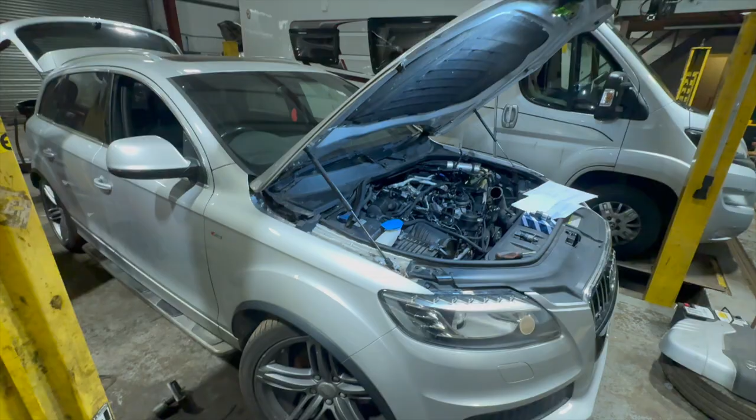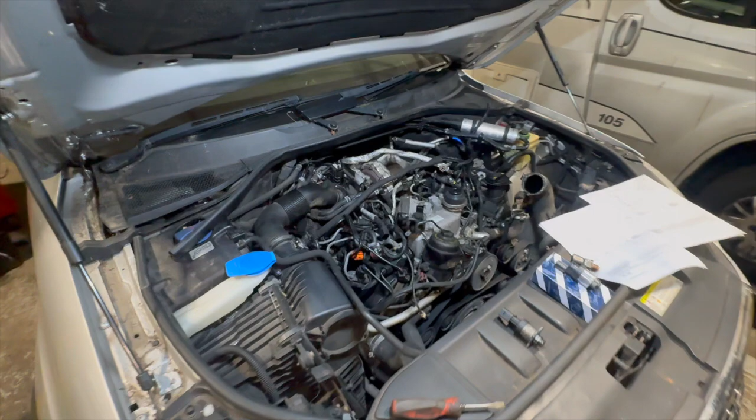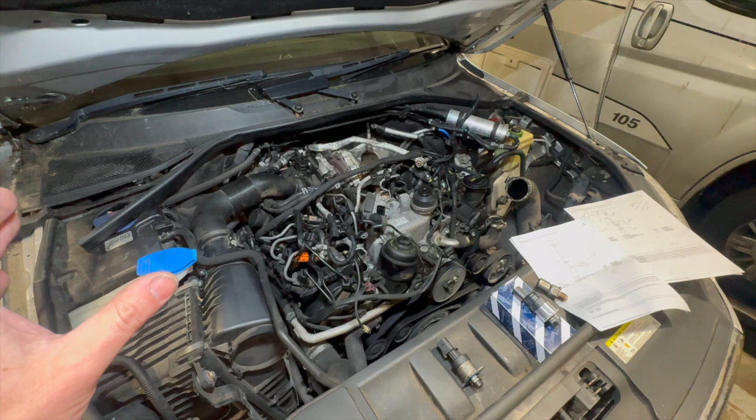Just put together a short video running you through a fault we've got with this 2013 Audi Q7. Basically this one's a non-runner, we've got a permanent fault code in it, and the fault code is P0091 Fuel Pressure Regulator 1 control circuit. I'm going to run you through information about the fault, the regulator, where it is, some tests you can do, and where I'm up to with this one. Long and short of it, I'm going to be replacing the regulator. I'll update you later in the video as to whether it fixes it or not. There is a possibility of it being an ECU fault, but this is the route of diagnosis we're taking.

So basically on the system it's got a permanent fault with regulator 1. Now there's two different regulators on it. Regulator 2 is this regulator here, which sits on the end of the fuel rail. There's a fuel pressure sensor in the system, which is this sensor here, but just at the minute you can see we're in the stripped down state. We've actually got the inlet manifold out from the middle of the V there, but the pressure sensor actually goes into the rail on that end there.

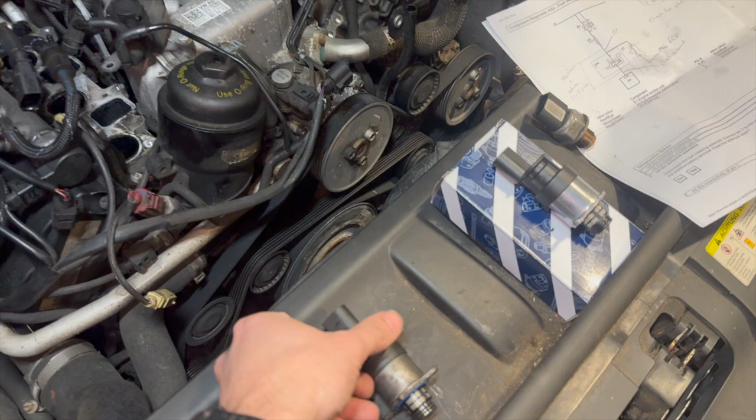And fuel pressure regulator 1, the item that we've got a fault with, or picking up a fault with on the diagnostic machine, this one here actually sits into the high pressure fuel pump, which sits right in the middle of the V, right at the back of the engine. And this is why I've had to strip the manifold off, to access it and get it out properly.

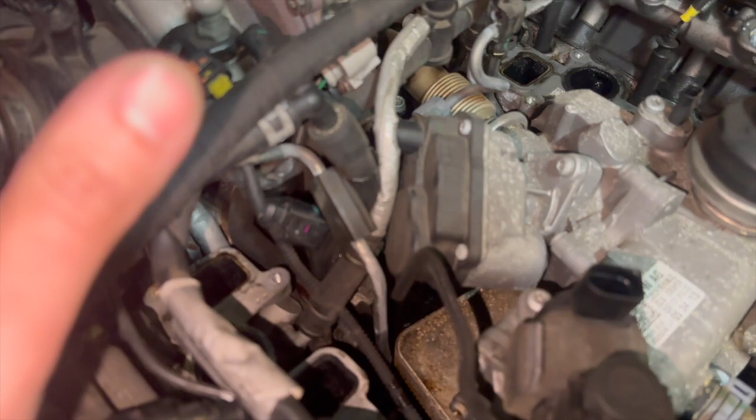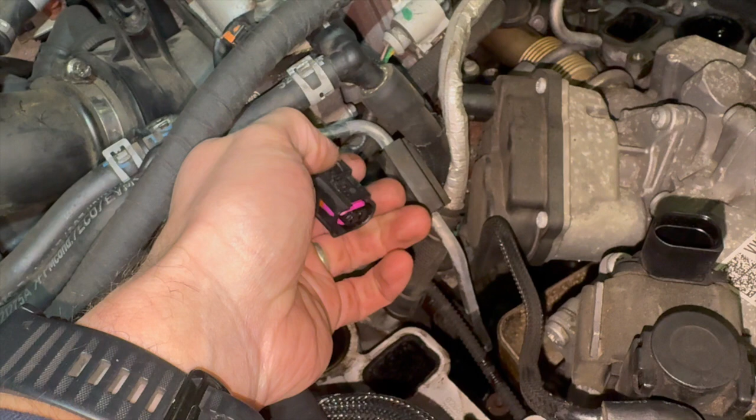But if you just look through this gap just there, this is the connector for it. It just sits in there, you can see it fits in with a couple of bolts. When the manifold's on, it's really tight. You can just reach in there to undo the clip on the connector and pop the connector back, but you can't really get the connector out. If you're a bit rough you can sort of force it off, but luckily for doing some tests on it, it's quite good - this connector actually comes round, round this side, and comes to this bit of harness there, which connects into that.

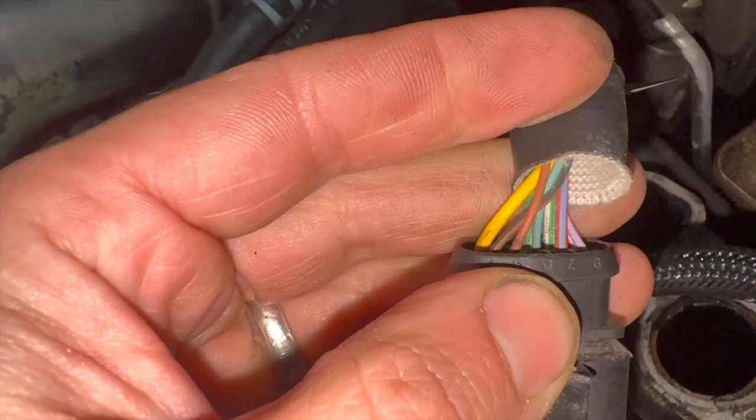So luckily you can actually test it at this harness, and the two wires on it are white and green, and red and blue. If you look on the bottom there, where it says pin 4, we've got the red and blue wire, and pin 8, the green and white wire. So you can use your multimeter on those bottom two to actually test for resistance through the regulator. And in doing that, if you've got resistance, you know you've got continuity on your two wires, and it's not a wiring fault in this harness to your connector.

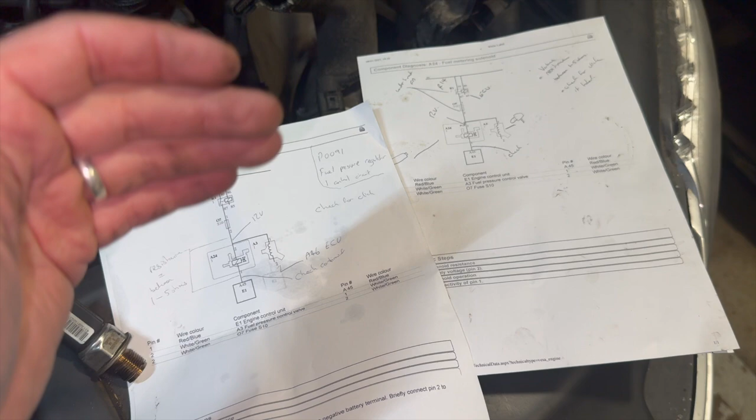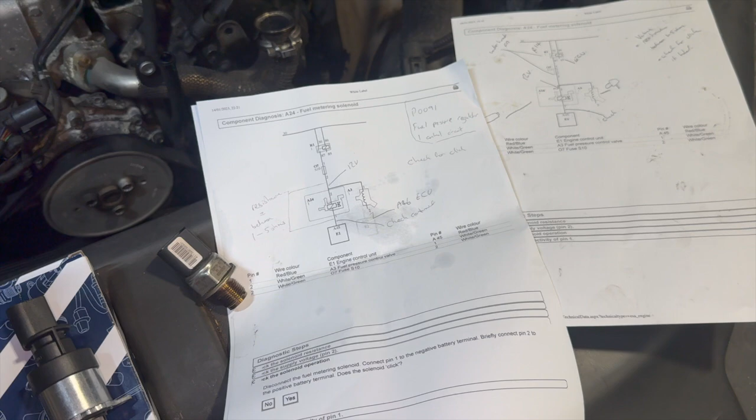But just looking at the wiring diagram - now I'll overlay some screenshots of the wiring diagram in a bit more detail and show you the exact procedures to do as well - I've tested all the wiring on this as far as I can go. There is a possibility of it being an ECU fault, but we're taking the gamble and taking the route of replacing this regulator first, to try that before going down the ECU route.

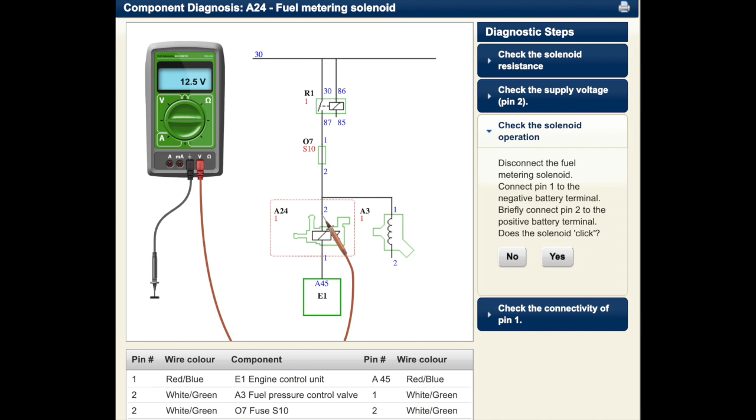Now these regulators, the factors and the dealers only sell them as part of a whole new high pressure fuel pump, which is obviously mega expensive and a lot more involved to fit. The only problem I had is I had to get the regulator out to get the number off it, to try and search to find one. And I'll put, if you check the description below, the part number of the unit and a link to a regulator and where you can get it from as well.

It's just at the price of this, it's going to be worth trying the regulator first. And with it being a permanent fault code, it's more likely to be an electrical issue rather than a mechanical issue. If the fuel pump was failing, normally it would allow you to clear the fault code and then it would pick the issue up as soon as you cycled the ignition or tried to start it again, whereas this is permanent.

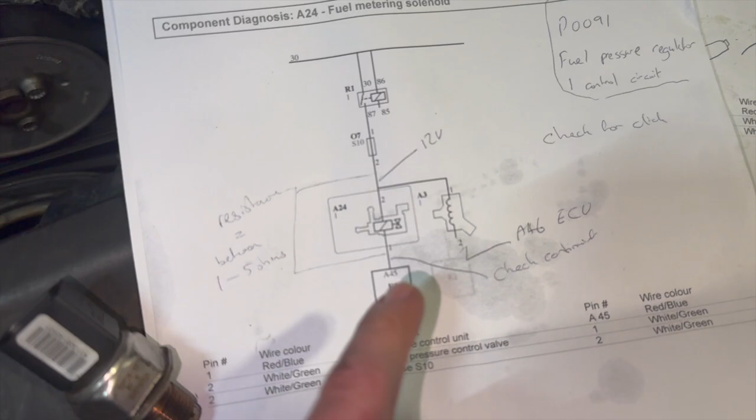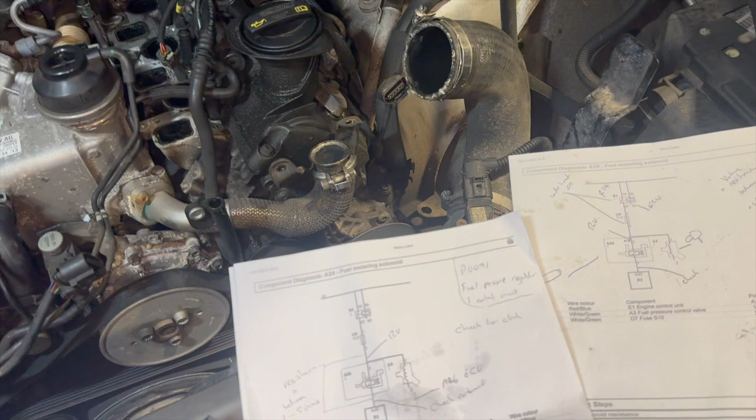But basically the checks that you can do on the regulator - so this is the regulator there - do a resistance check across the two wires. It should be between 1 and 5 ohms. When I was testing mine, I did it across the two wires and I actually had a reading of 3 ohms on it, so I know there's continuity through the wires to the regulator, and it's within tolerance. The other thing we can do, we need to check the 12 volt feed to the regulator.

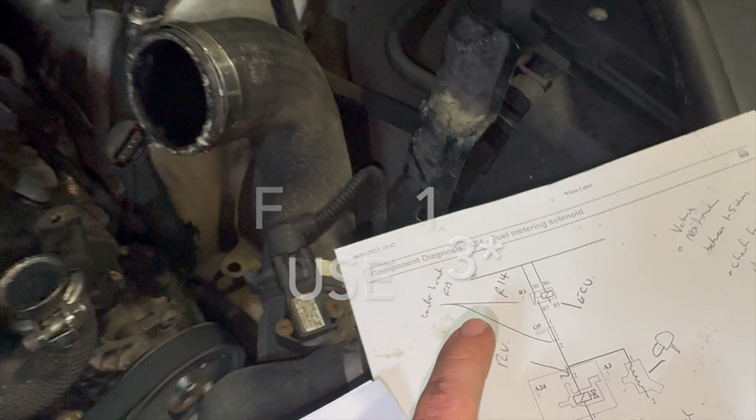Which comes in on pin 2 there. Now there is a fuse in the system and a relay as well, and that fuse is fuse 13 in the fuse box and relay 14 in the fuse box again as well. That's just the under bonnet fuse box, which is just located under that cover there.

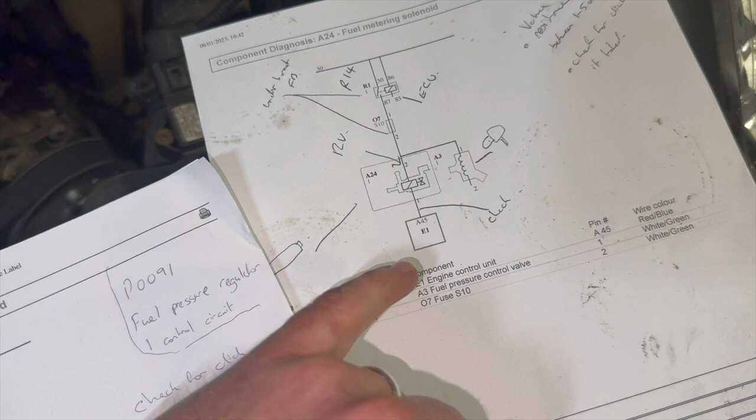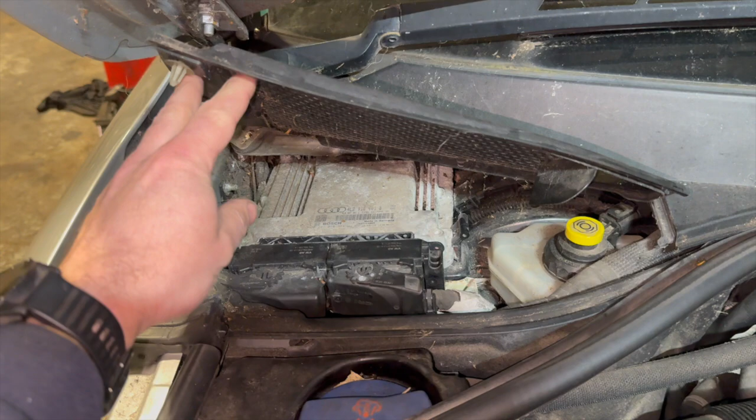The other thing we need to do is check continuity between pin 1 and A45 on the engine ECU. Now to do that, it's not too bad. You can check it from this plug there, but obviously on the other side, the engine ECU is just located under there. Now, the only problem you'll have - the ECU just holds in with a couple of plastic tabs there. It's actually quite easy to get out.

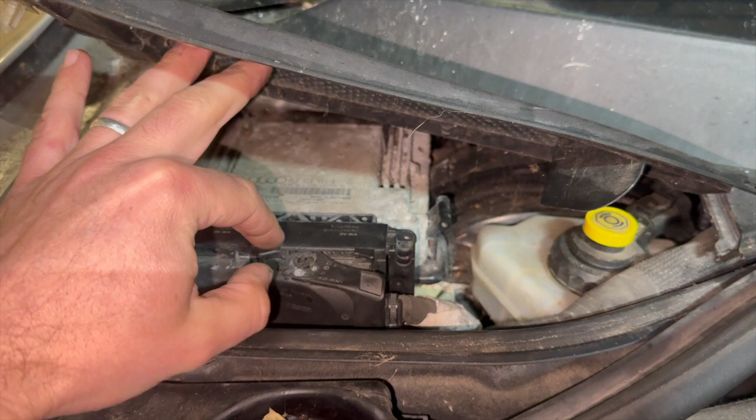I can't remember what connector it was on, but it's on one of these - you'll find the 2 pins there. Now, this originally, unless yours has been took off, might actually have a security tab over the top of it, but luckily on these Audis, it's not too bad to deal with. You can undo the ECU, just pull it out, and the security tab just stops you taking the connectors off.

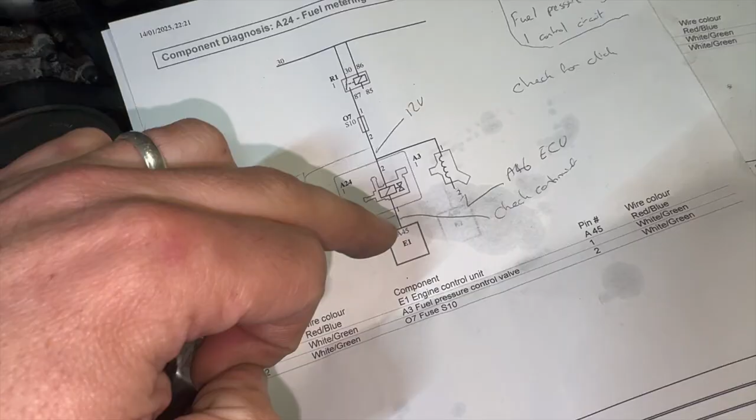But basically what you can do is just use your grinder, just put a couple of little slits in the bolts, then you can undo the 2 bolts with a flat bladed screwdriver. Once you've got that off, you can test your continuity between pin 1 on your regulator and your ECU as well. And you can actually check the operation of the solenoid as well.

Again, you can do it just through that connector there. It is a 12 volt regulator, so you're okay to use like a power probe and basically just listen for the regulator clicking. Now, I just powered it up through there and I could hear the regulator clicking, so that was a good sign. But at the minute, it's a permanent fault.

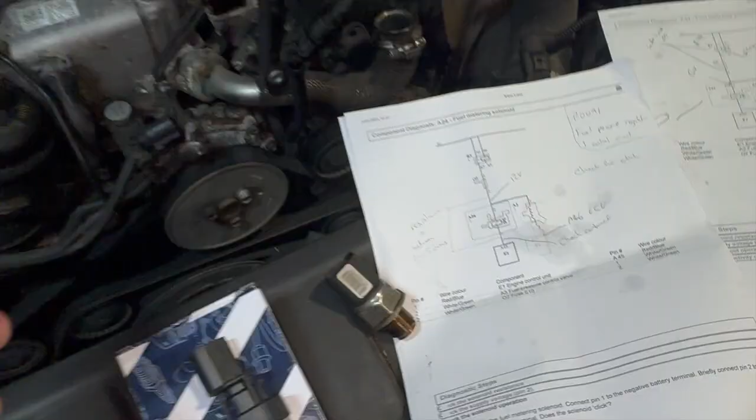I'm hoping it's going to be related to the regulator, so what I'm going to do next is get the regulator fitted, and then we'll let you know if it fixes the fault. So there is a possibility it could actually be an issue with the ECU, but for the price of it, I'm going to try the regulator first.

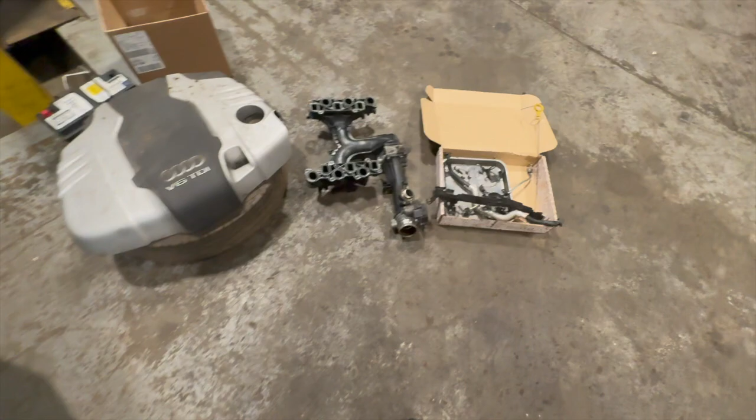It's just a little bit of a pain that to get this regulator off, you've got to take the manifold off. There's no way you'll get it out - you just cannot access it without getting that manifold out, that's all. But if I just show you the manifold, you can just see it's quite a big lump.

I've ordered some new manifold gaskets. Obviously they really want to be replaced while you've got it off, but there's quite a few bolts on there holding that on. I've taken this front section off with it as well. There's some bolts holding these 2 pieces to secure them up, and obviously a fitting for the pipe there. See a bit of trim for the wiring harness.

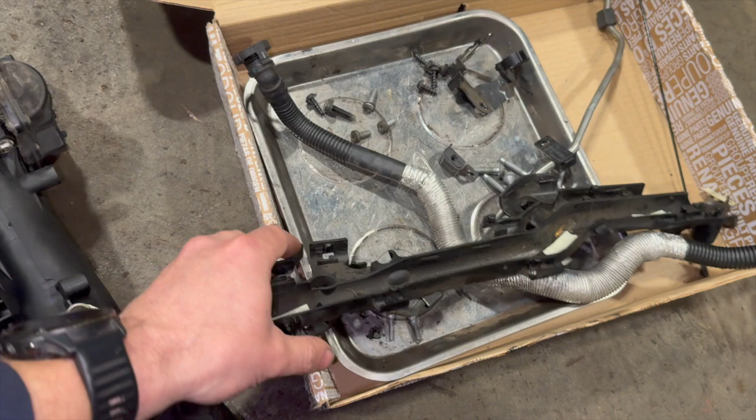One of the fuel pipes has come off, breather hose, a load of brackets on there as well. Now, it is a little bit fiddly to get the manifold off. It's not too bad, but things like the injector return hoses come over the top of it, so you'll have to undo that from one side to pull it out of the way.

Quite a bit of the wiring harness and plugs have to come off and get out of the way. Some of the high pressure fuel pipes at the back sit just over the top of the manifold and make it a bit tight to get out, so you need to undo them. I've taken one fully off, and on this side I've just undone it.

Just eked it back a little bit to allow room to get it out. When you've got all the bolts undone, sometimes the manifolds can be stuck down a little. You want to be careful, make sure all your bolts are out, but sometimes you just need a little light prying to crack the manifold off. Sometimes they just get really stuck down, that's all. But yeah, the manifold's off now.

It'd be nice to just plug this connector in and try to clear the fault code. Because it was a permanent code I couldn't clear, it would tell me quite quickly whether it was going to be the issue or not. But the problem is, because the manifold's off and all the fuel pipes are off, it's got pre-pump in the tank. Not really going to be able to do that until I've built it all back up.

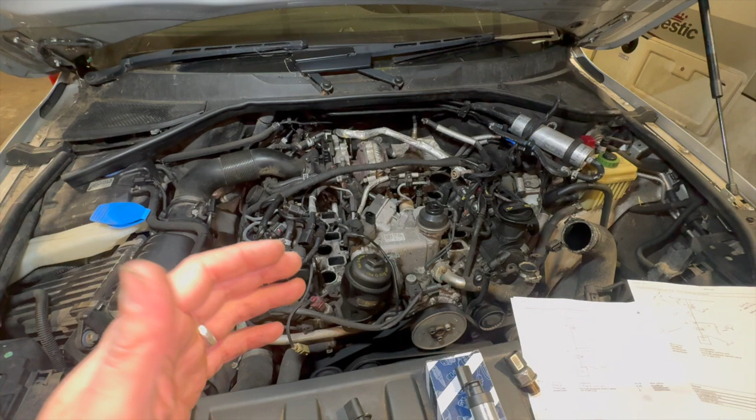So I'm going to skip through the stage where I'm refitting it, but I'm just going to get the regulator fitted now, get everything back together, and then come back to the video once I've done that and show you where we're at. Hopefully it'll clear the fault and it'll be running. If not, we're going to have to carry on the diagnosis and go down another route. We might have to send the ECU off, so I'll crack on now, get all that done, and update you shortly in the video. Hopefully we can get this fault fixed.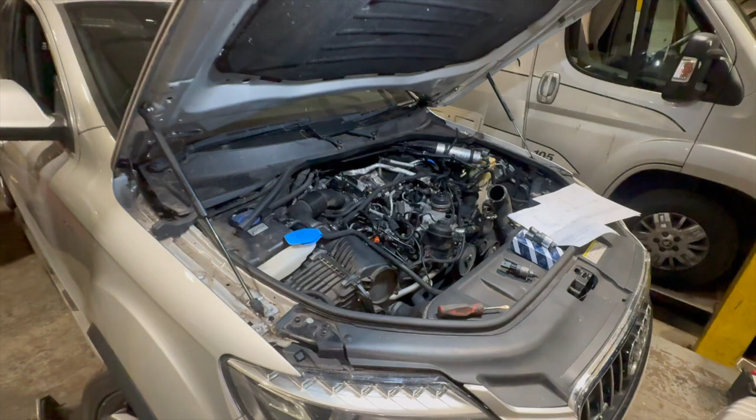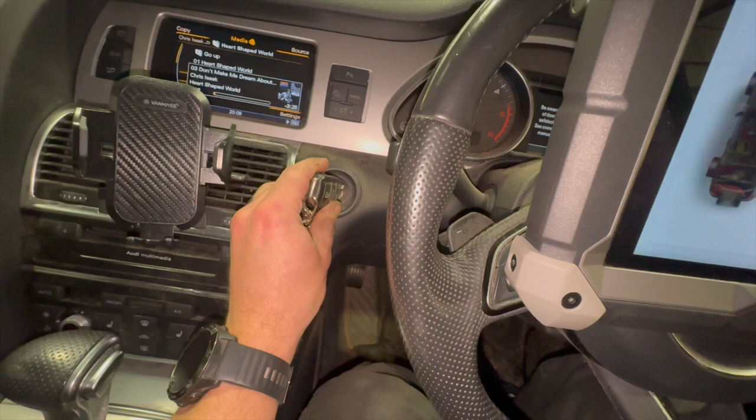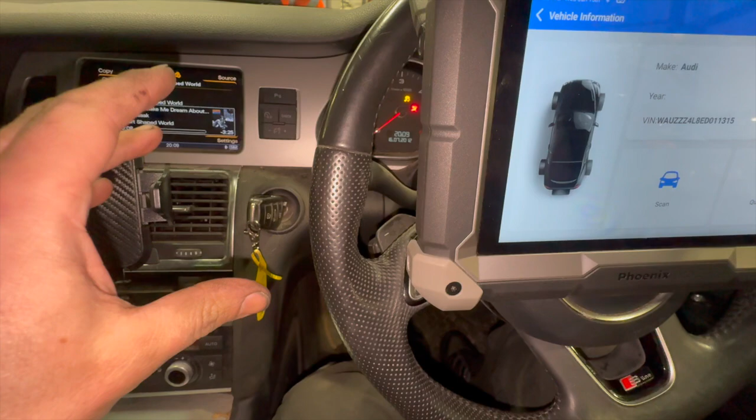Right, so I've just got in the vehicle. The only thing I've just done before trying to clear the codes and start is cycle the ignition a couple of times. Just do that, you can just hear the fuel pump working in the back. Because all the pipes have been off, you really want to cycle your ignition a few times just to prime the fuel system. But yeah, let's just do a full scan now, and hopefully, fingers crossed, we can clear that fault code out.

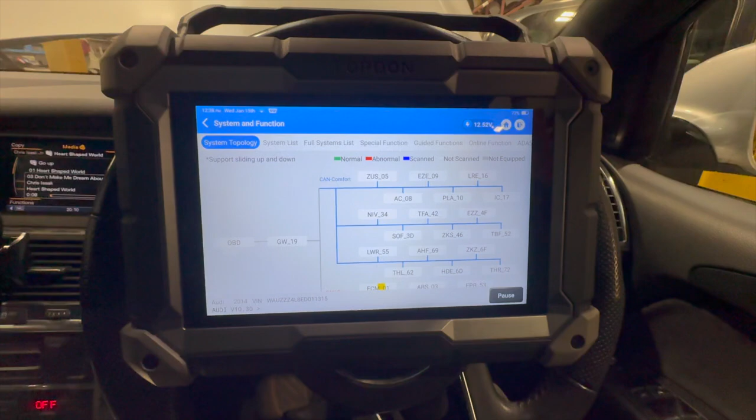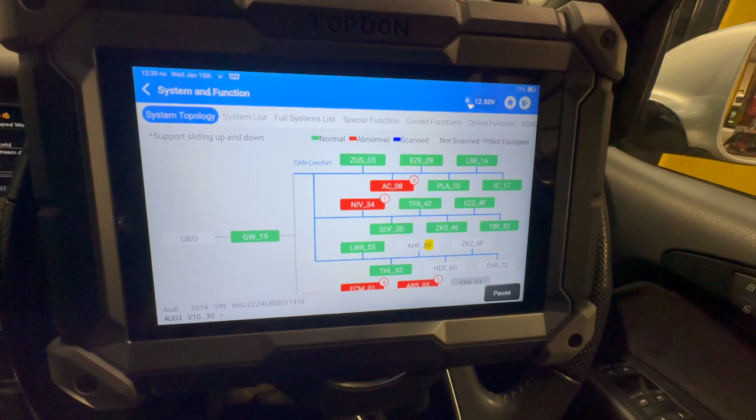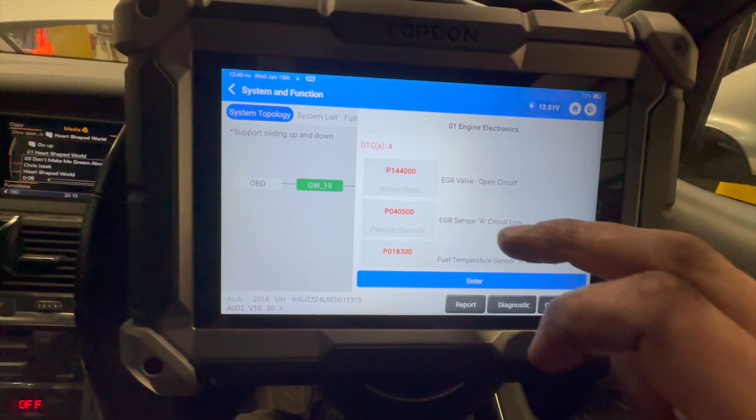Right, so as suspected, there's quite a few fault codes in there due to having all those sensors disconnected and stuff like that. There's going to be a few bits in there. Now, this was the one we were originally looking to clear that's permanent and that we can't clear. So let's just do a full code clear and see if we can get rid of it.

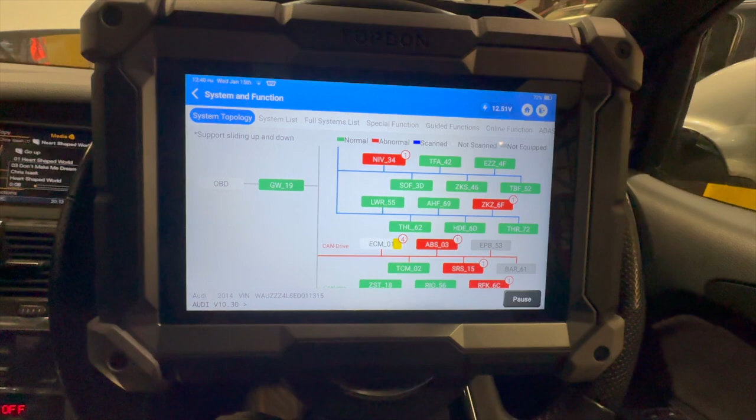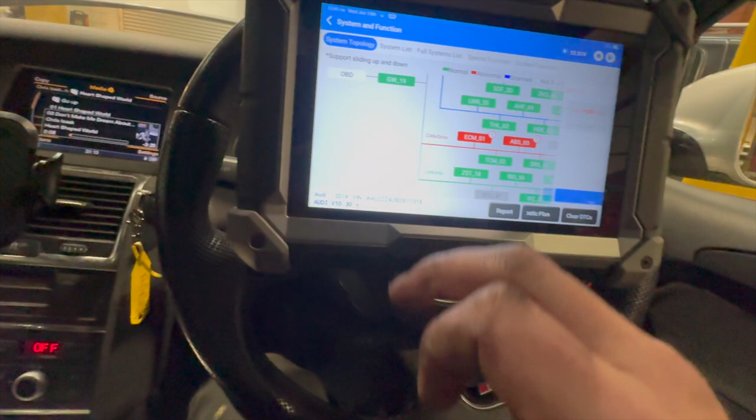Right, so it's not looking good at the minute. The fault code is still in there. We're just going to try and start it up to start with, and go from there. It looks like we might be having to spend a bit more time on this one. Let's just give it a bit of a crank and see.

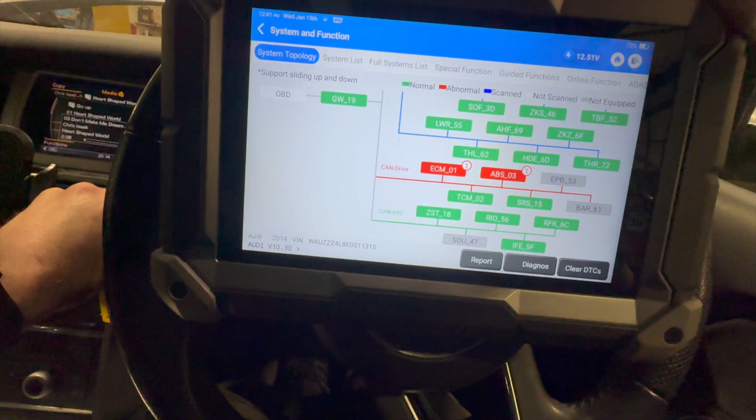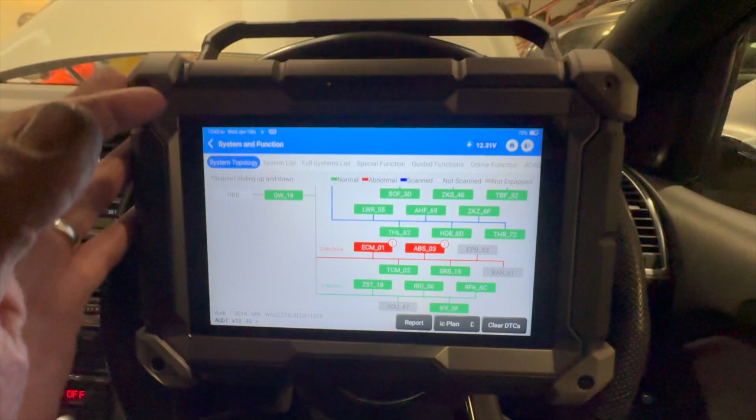It's not looking too good at the minute. It looks like we might be having to go down the ECU route now and send that off to get tested. So we'll do a little bit more digging into it, see if we can get a bit further along, and update you shortly.

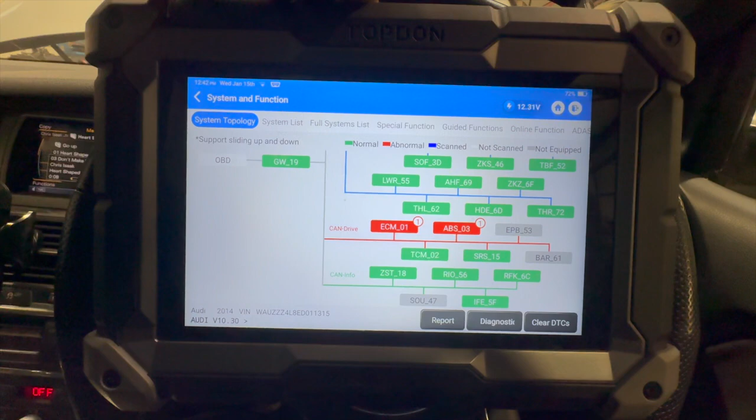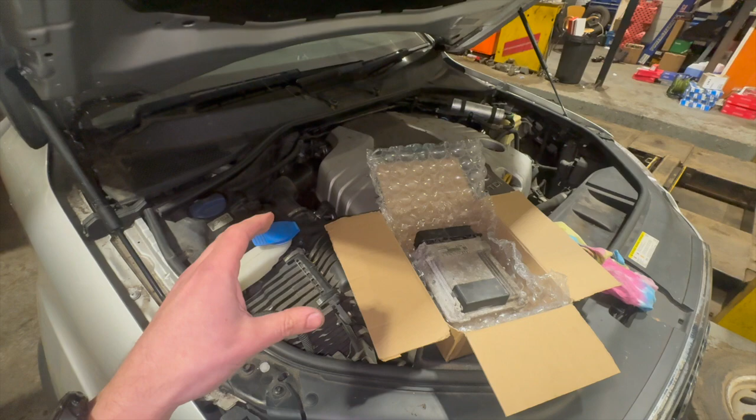Right, so it's two weeks later and we're back on the Audi. Bit of good news, a bit of bad news. Obviously I'd fitted the regulator, I took that, it was a little bit of a gamble. I wasn't 100% sure if it was going to be the regulator or the actual ECU that was the fault.

With the cost of the regulator, I decided to go down that route and try the regulator rather than sending the ECU off. I don't really like to condemn ECUs, I've not had to replace many in my time in the trade. Normally I find the fault ends up being something else or a wiring issue, and sometimes if you send it off and they're not 100% sure, you end up committing to a repair cost and it not actually being that. But unfortunately this time it obviously wasn't the regulator.

I've sent the ECU off to a company called ECU Testing that we use, they're in the UK. There's another one we sometimes use called ACtronics, but they couldn't actually test the unit when I gave them the number. ECU Testing have tested the unit and confirmed it's at fault for the code I was getting. The only problem is it's too bad to repair, so they can't actually repair the unit. So we're a little bit stuck in limbo land at the minute.

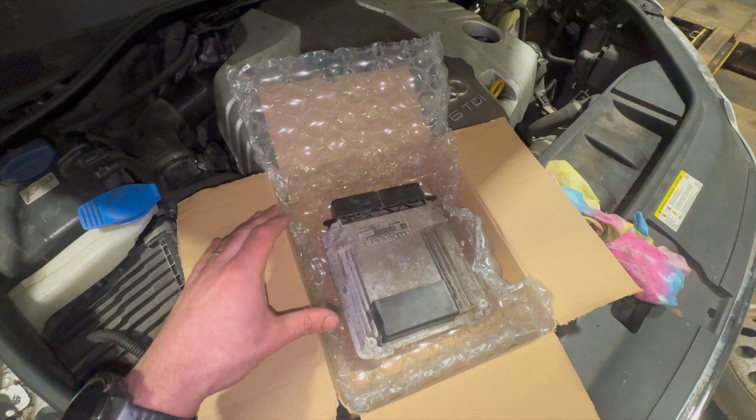There's a couple of options. I might be able to get a decent second-hand one, send it off to them with this one, and they might be able to make good out of it with the other ECU. But at this stage I'm a little bit unsure what we're going to do. We might have to look down some different avenues, see if we can source another ECU from somewhere. Hopefully we can still get it sorted. I'll update you more, hopefully in a few weeks, if we can get it up and running and get some sort of answer sorted.

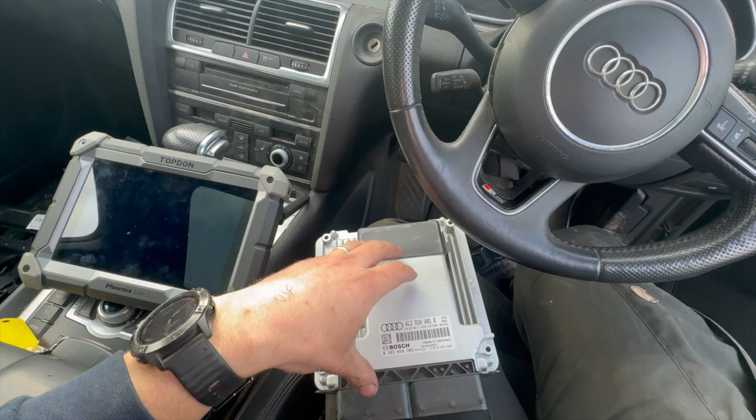Right, so we're back on the Audi job. It's actually about 4 weeks later now. We'd narrowed it down to the ECU, but we had to leave it with the customer while he was deciding the best route to take. He's come back to us now - he's actually managed to find an ECU that's been cloned from his old unit, so we've got this one back. He's dropped this off to us.

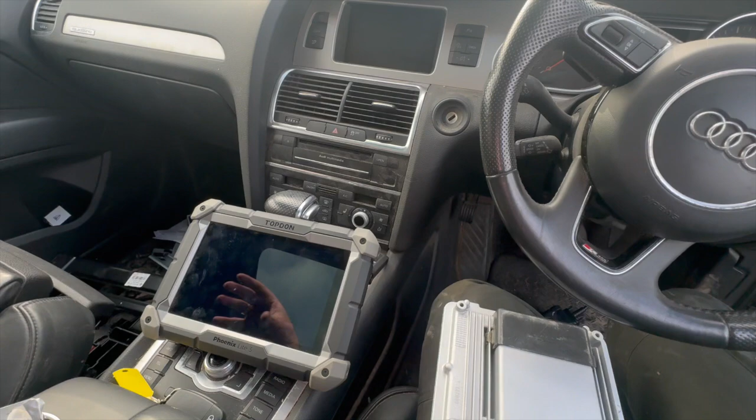So hopefully, fingers crossed, this is going to do the job. We're just going to get it all put back into place now. Obviously the battery's been off it for about a month, so we'll get it all reconnected up, do a code scan, see if we can clear the codes. There was a permanent fault there before on that regulator, so hopefully we can now get it started and back on the road again.

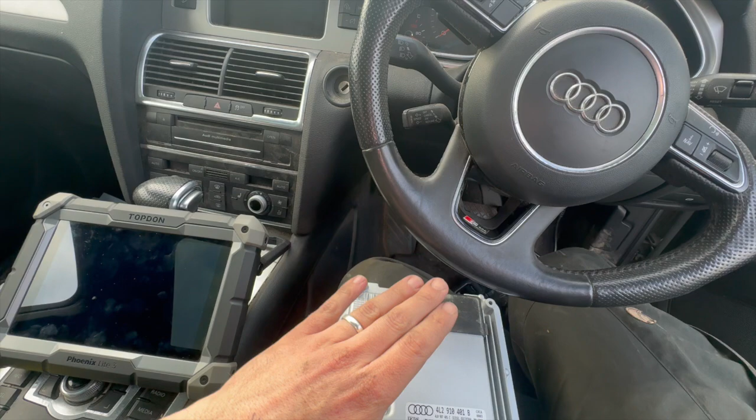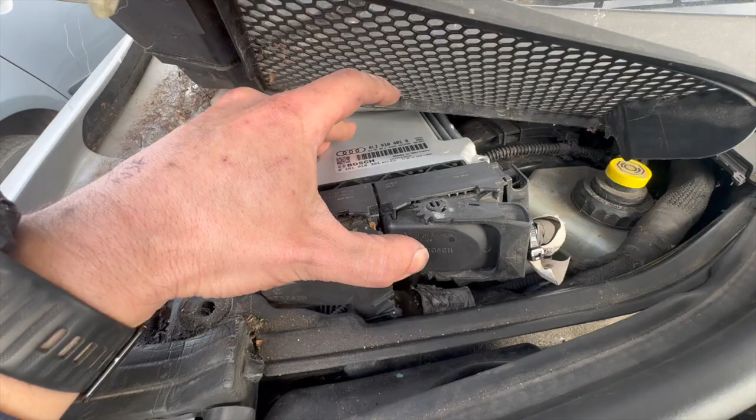Just quickly for now, not clipped it fully into place, just want to get it powered up and see whether it's going to fix the fault for now. So we'll just get the battery connected back up and get it hooked up to the diagnostic machine.

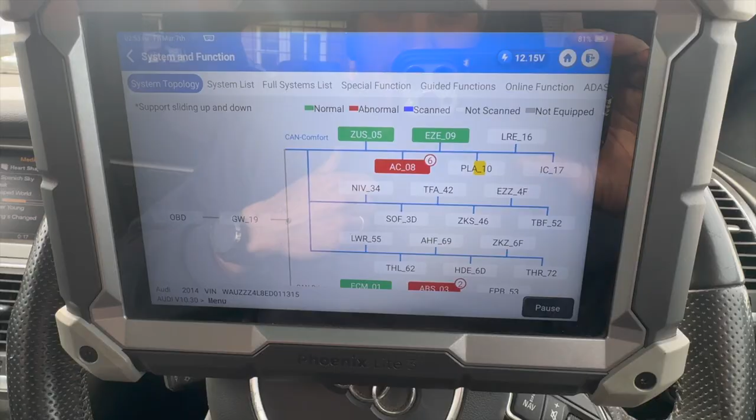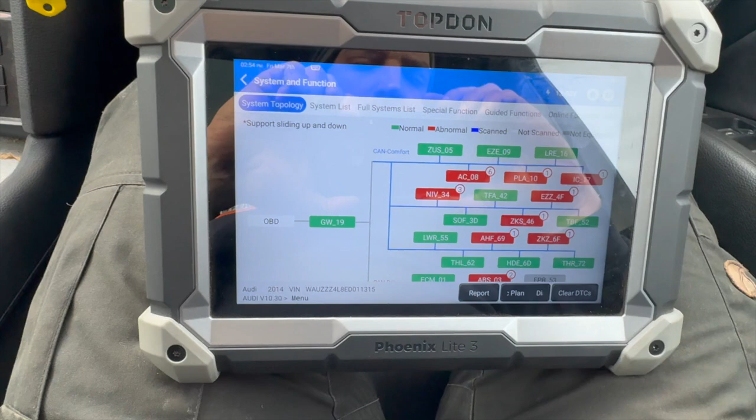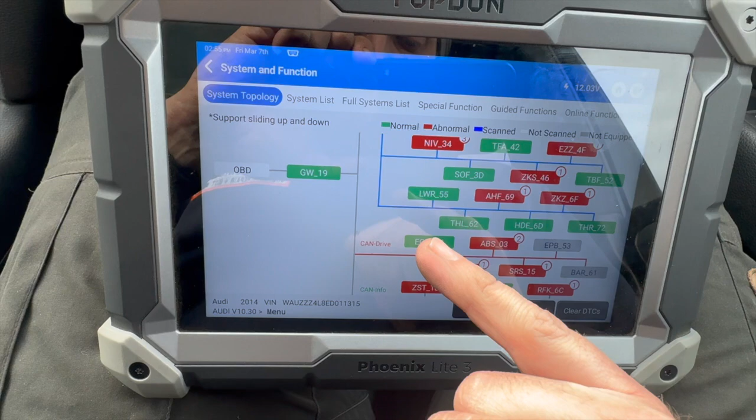Right, so I've done a full code scan there. Obviously the ECU's been off, it's been sat for ages, so I was expecting quite a few codes in there, but without clearing it, I can just see the engine control module is all green, which is a really good sign to start with. Let's just clear everything anyway.

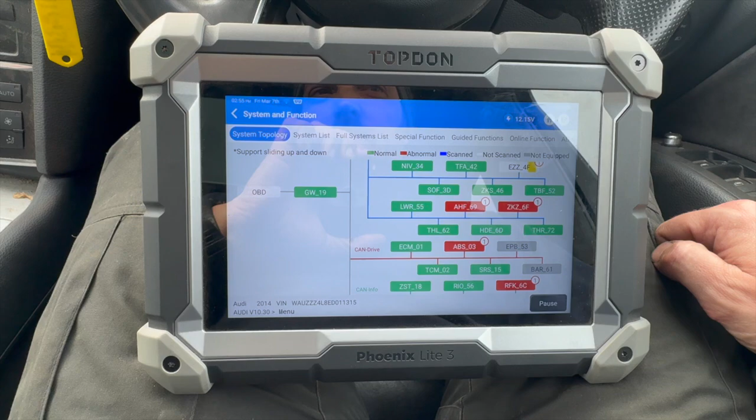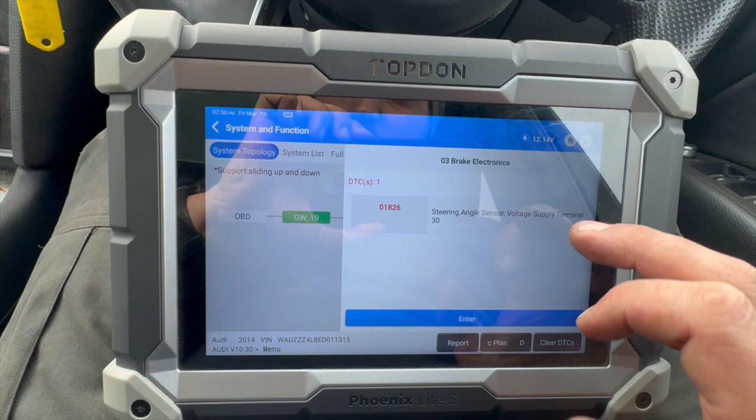Right, so let's have a look. We've just got a couple of codes left, one in the ABS, steering angle sensor. That might clear once we get it started - we might need to calibrate it again, might just be due to everything being left for so long. So another steering angle sensor code in there as well. But let's give it a crank now, see if we can get it fired up. I'm not convinced it's going to fire straight up, obviously - the fuel system has been apart as well, but let's give it a crank and see what happens.

Oh, trying. Oh, we're idling, a little bit lumpy. It's a good sound. That's a big relief to hear that.

I don't really like condemning ECUs. To be honest, in all my time in the trade, I've not actually replaced many ECUs for a fault, and that's why I went down the route of just trying that regulator, even though I wasn't really convinced it was definitely that to start with. But yeah, this time it has turned out to be an ECU fault.

I've just put this video on there as well. Hopefully anyone with the same issue, just to give you a bit of a heads up on the code and what it might be. And if it appears that the regulator is okay, it could be an ECU fault.

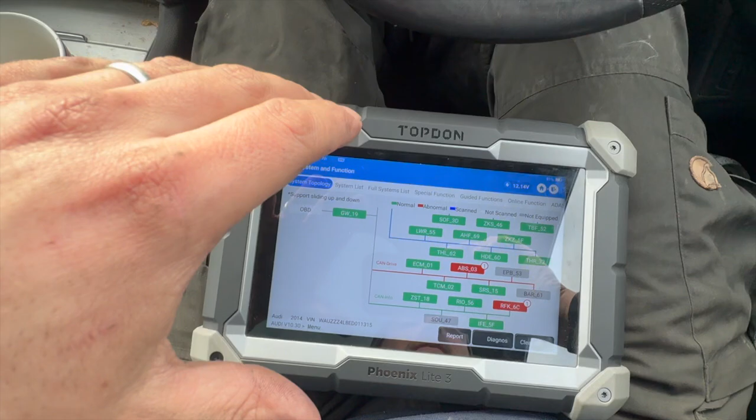But yeah, just for now I'm going to turn it off. I'm not going to leave it running too long. I've just chucked the ECU on at the top there, I haven't fitted it into place properly, but we know it definitely runs now. So we're just going to get a few bits back together and see what happens. Once we've got everything back together, I'm pretty sure we're going to have to run through a few bits, maybe a steering angle calibration and stuff like that as well.

Just update you shortly, just get a few things back together. Obviously the battery's out, the seat's out, just to get the battery in. Let's get it all back together and finish the video off. Thumbs up, nice to get that job fixed and get this vehicle back on the road again. It's obviously been stood for, all in all, nearly probably 8-9 weeks now.

Everything's back together under the bonnet now. The ECU's tucked correctly back into place there and all clipped back up. Just give it a quick clean up, get the battery on now, give it a run, give it another scan.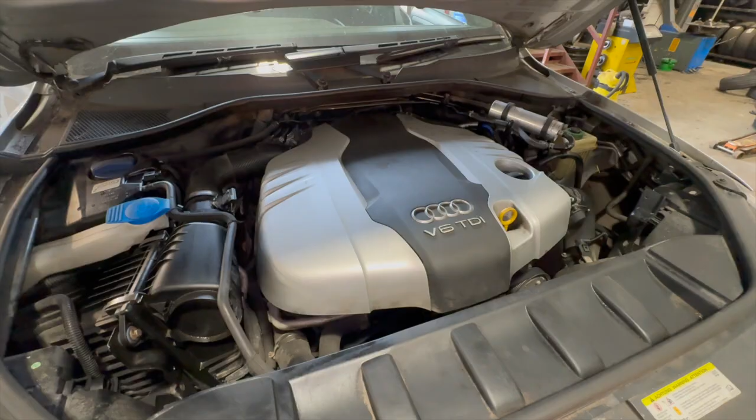Right, so everything's back together inside now as well. Under the bonnet's all back, the seat's all back, the battery's all back together. Just give it literally a quick run to clear anything and let it realise that the ABS system and everything's okay. So we're just going to do a quick full scan on it now and see if we need to set the steering angle up.

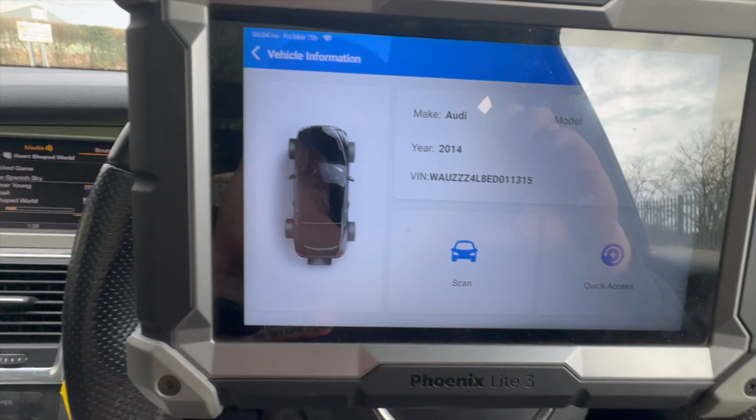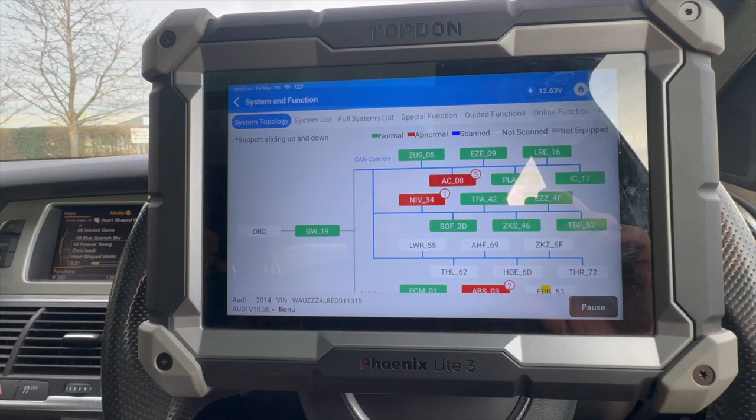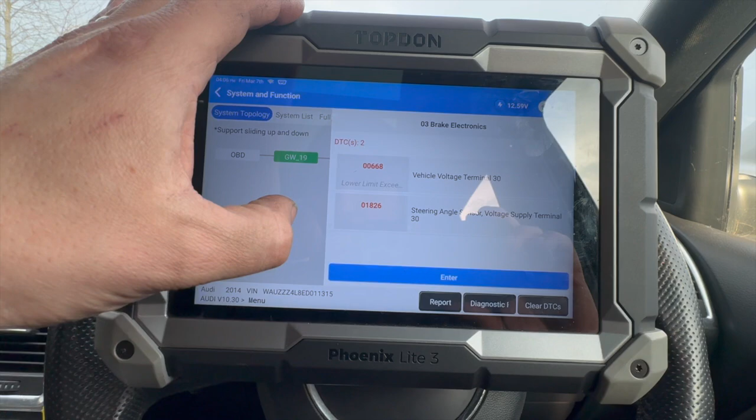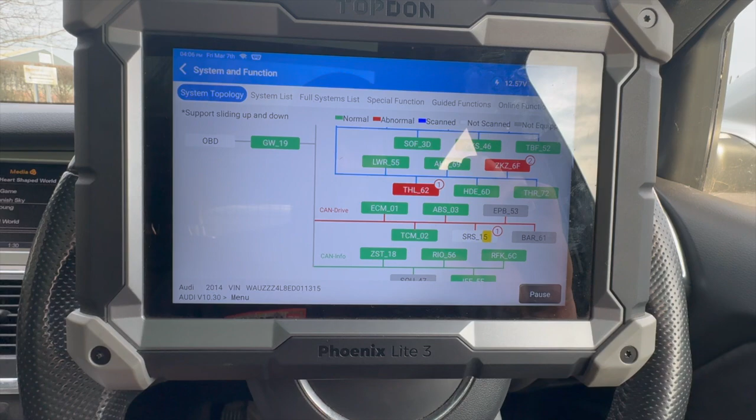So on the full scan there, we've got a steering angle voltage fault there. Now I have had the battery disconnected again while getting everything back together, so some of these faults might be due to that. Let's just see if we can clear it out and try to run through the calibration anyway.

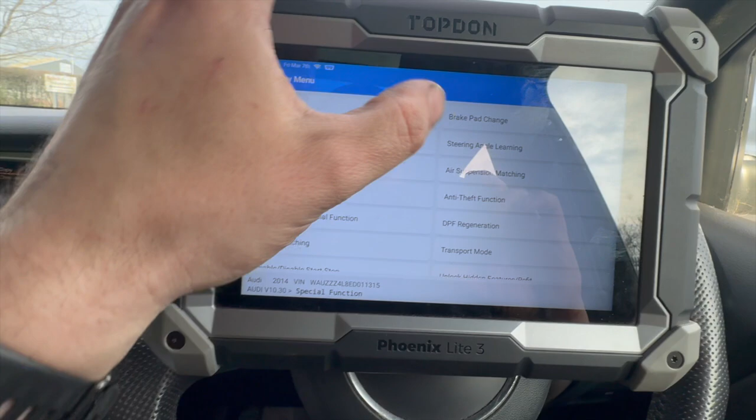So we'll see if it clears all the faults there. And if we go into special functions, you can see we've got steering angle sensor learning there. Just clicked on the wrong one, so we're going to run through that now and see if we can set that up.

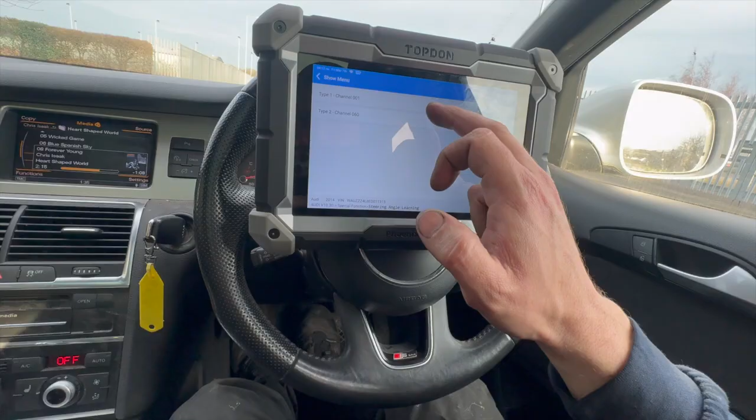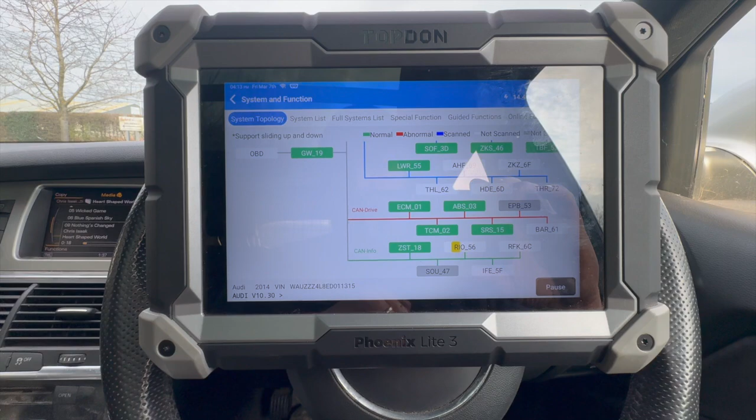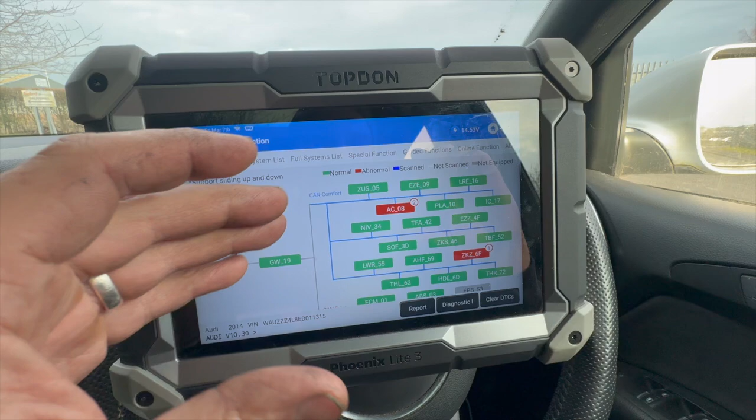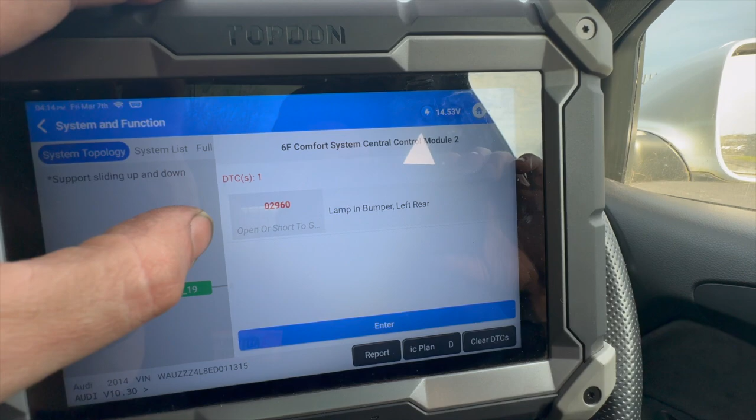And we see, done a full code scan now after we've done the steering calibration. Nearly got a clean bill of health there, just a couple of little issues left - something in the air conditioning ECU, and an issue in the comfort system. So nothing we're worried about. We've got the steering angle fault out, the engine ECU, and obviously the main thing - we've got that engine fault sorted.

It runs spot on. All I'm going to do now is give it a decent road test, probably put at least 15-20 miles on it, and when you've had the fuel system disconnected, really you want to leave it overnight and check it in the morning. If you've got any slight air leaks into the system, the fuel will run back and it'll tend to start badly in the morning or when it's been left. So just going to give it a decent run now, check it in the morning, and then after that this can all go back on the road and back to the customer.